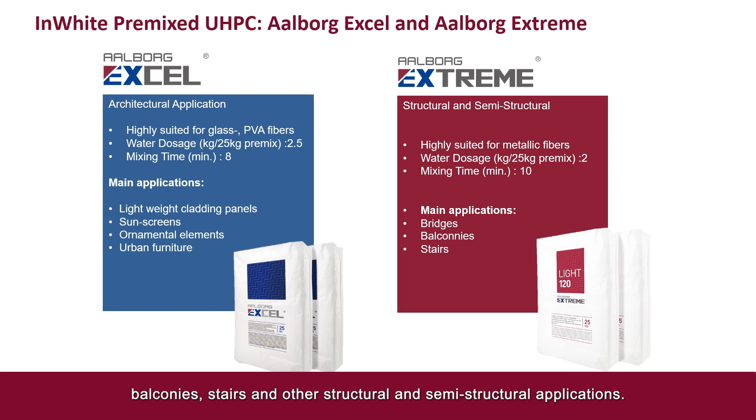Extreme is highly suited for metallic fibers and can be used in bridge decks, balconies, stairs and other structural and semi-structural applications. InWhite UHPC has been widely used in buildings, pedestrian bridges and landscape sectors.

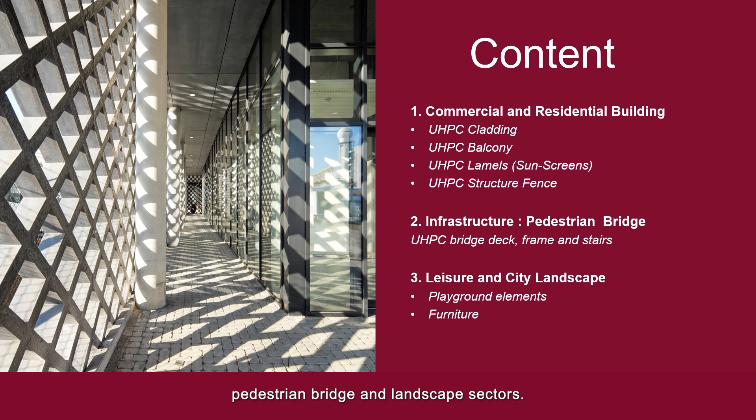We will introduce different applications through a couple of projects over the globe. First sector is commercial and residential buildings.

UHPC facade, lamels and balconies are widely favored by architects and property owners to enhance the building aesthetics and durability.

The new Westminster Secondary School is one of British Columbia's largest school replacement projects. The total project area is 22,000 square meters with 3-story facilities. It is LEED Gold Standard certified and was inaugurated in September 2020.

The new building is designed and built based on a design-build process. Graham Design Builders with KMBR architect planners were selected to design and build the new school. The building facade is composed of light color UHPC panels and dark striped wooden panels.

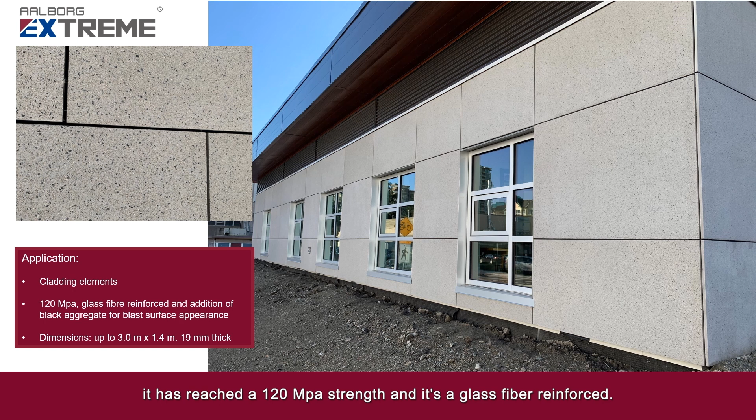The dimension of the panels is around 3 meters by 1.4 meters, only 19 millimeters thick. It has reached a 120 megapascal strength, is glass fiber reinforced, and we added some black aggregates for a blast surface appearance.

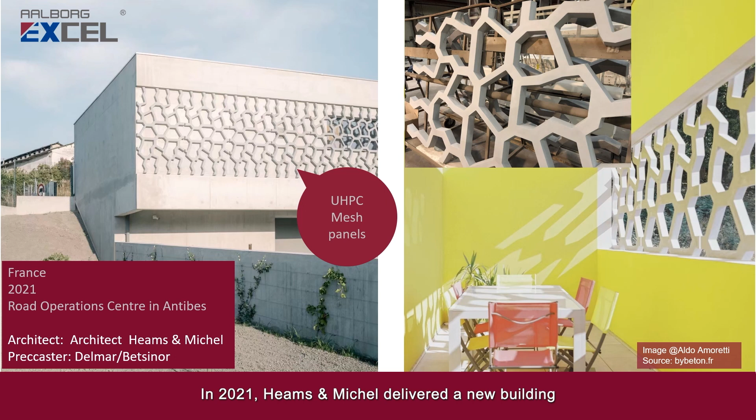The Antibes Road Operations Center. In 2021, Heams and Michel delivered a new building to house the Alpes-Maritimes Departmental Road Operations Center. The building is constructed entirely of unfinished grey concrete with a smooth finish.

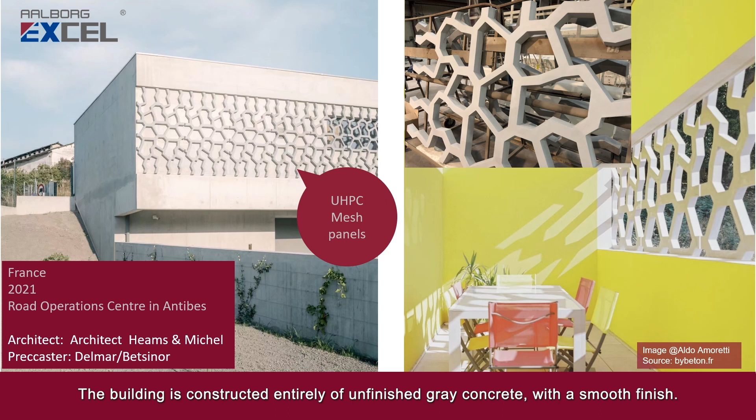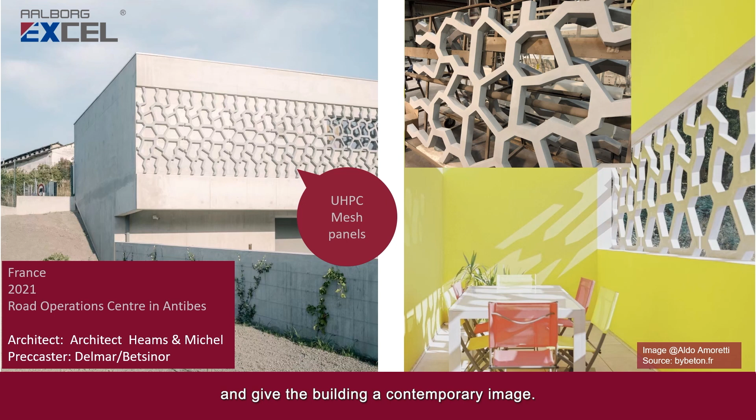Excel UHPC mesh panels in white color are part of this architectural identity and give the building a contemporary image. The pattern is inspired by the tire footprint of a road machine.

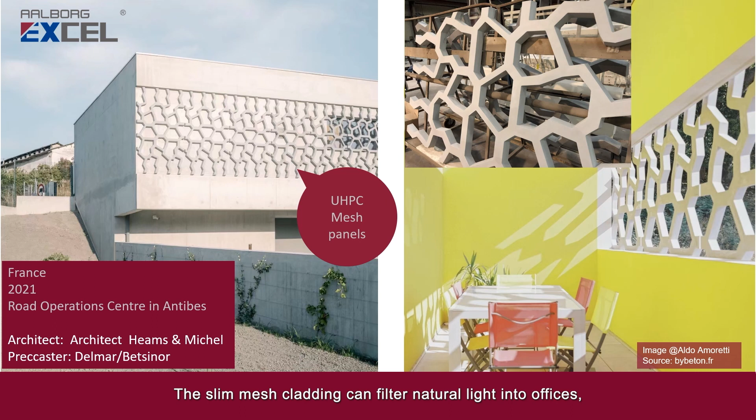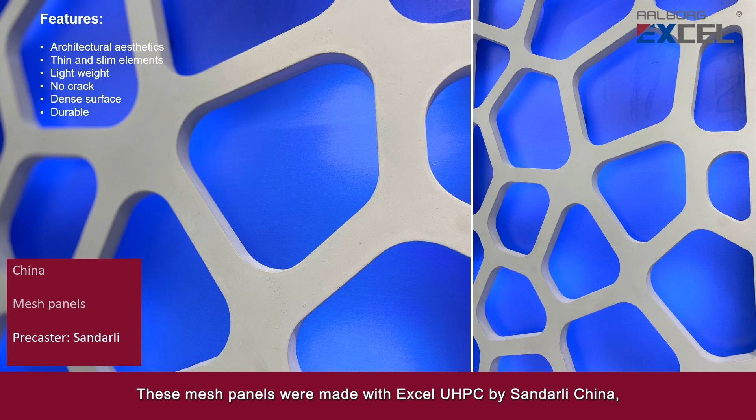The slim mesh cladding can filter natural light into offices, creating a game of light and shadow for the interior space. These mesh panels were made with Excel UHPC by Sandarli out of China.

Mesh area reaches 65% of the entire panel. The cross-section thickness is 30 mm and the width is 40 mm.

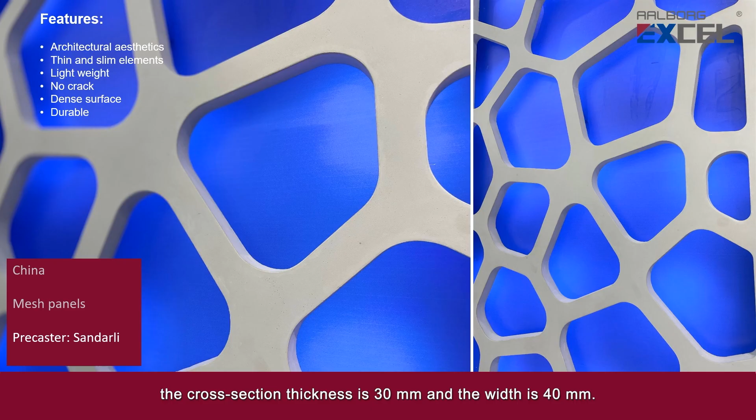Louisastraat in Ostend, new project. It's a new apartment building in the center of Ostend.

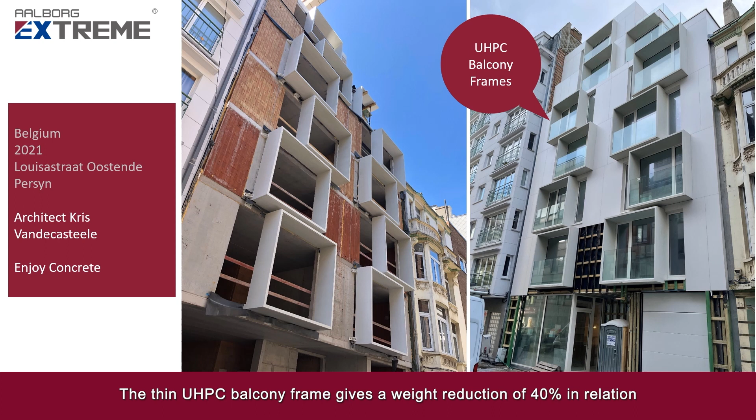This thin UHPC balcony frame gives a weight reduction of about 40% in relation to traditional concrete, giving the building high architectural aesthetics. The UHPC balcony was produced in one piece, so no joints are visible, with a very stable geometry.

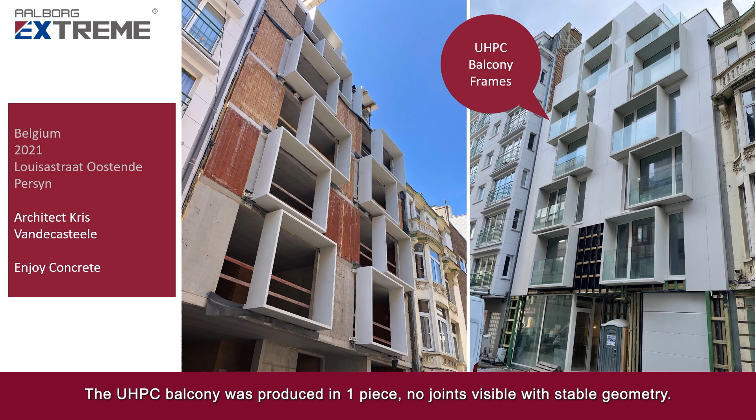The architect Kris Vandecasteele wanted something very new, very special, very slim, very slender, and also in one piece, but strong enough to hold persons.

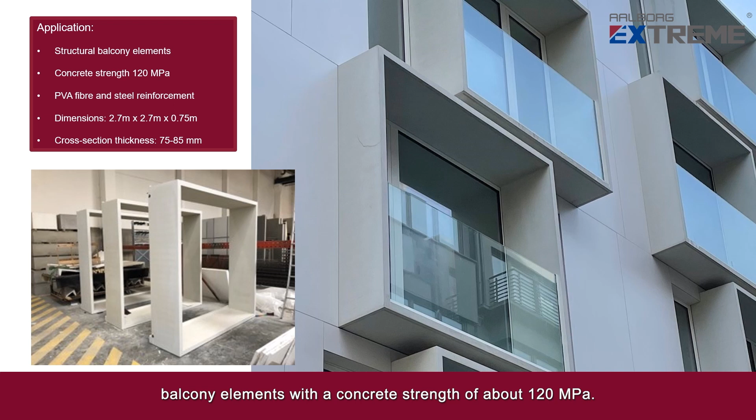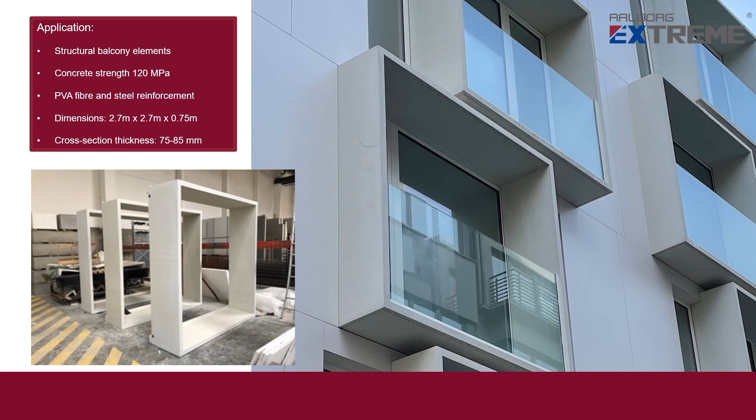So these are structural balcony elements with a concrete strength of about 120 megapascal. It's PVA fiber and steel reinforced, with dimensions of 270 by 270. The cross-section thickness is only about 75 to 85 millimeters, so very, very slim.

A new apartment building in Kortrijk, Belgium, with large window surfaces. This is why it needs protection from the sun. The slenderness of the UHPC lamels gives a weight reduction of about 40% compared to traditional concrete elements.

It's easy casting without steel reinforcement, only PVA and PP fibers included. The light gray color is mixed with white extreme UHPC and a small quantity of black pigment.

The vertical casting ensures smooth surfaces on both sides compared with aluminium or steel lamels. UHPC is more durable, requires less maintenance, thanks to its dense surface, and never needs to be painted.

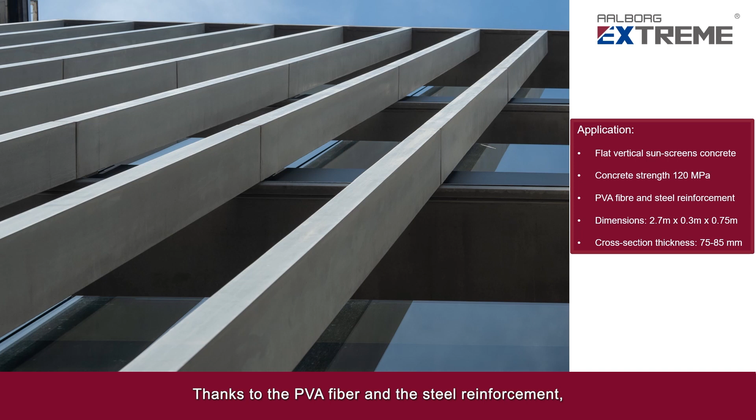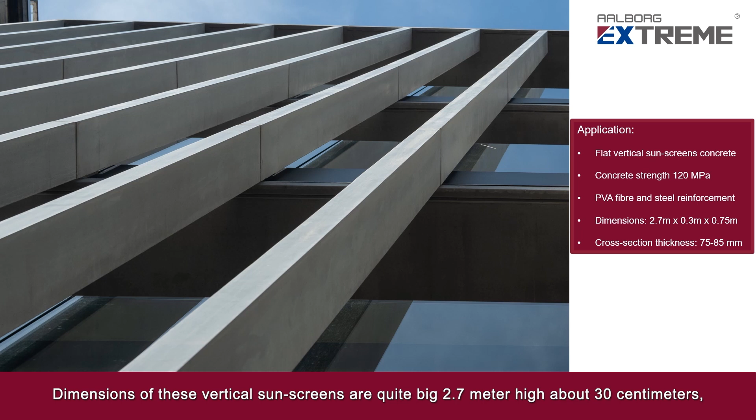Thanks to the PVA fiber and the steel reinforcement, we reached a concrete strength of about 120 MPa. Dimensions of these vertical sunscreens are quite big: 2.7 meters high, about 30 centimeters wide, and only 75 millimeters thick.

Beautiful building in Newport, Belgium, Lighthouse Corner. The same UHPC lamels design concept has been applied for this new apartment building in Newport, completely in white UHPC.

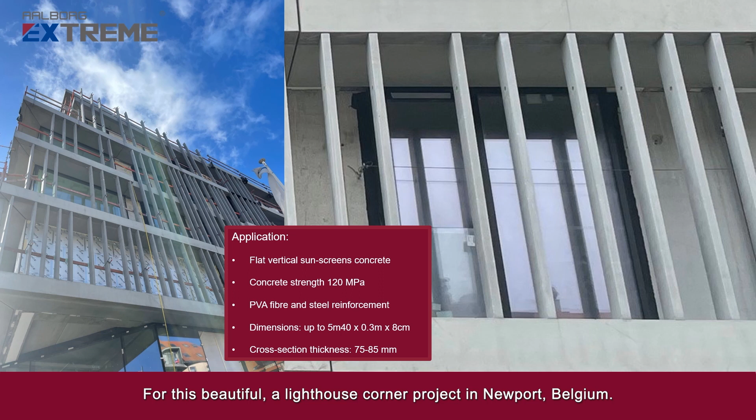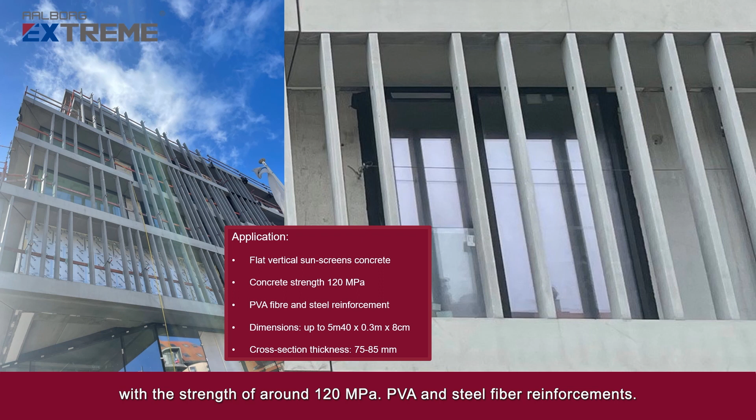For this beautiful Lighthouse Corner project in Newport, Belgium, they used flat vertical sunscreens in UHPC concrete with a strength of around 120 MPa, PVA and steel fiber reinforcements. The dimensions were 5.4 meters at around 30 centimeters of width and only 8 centimeters of thickness.

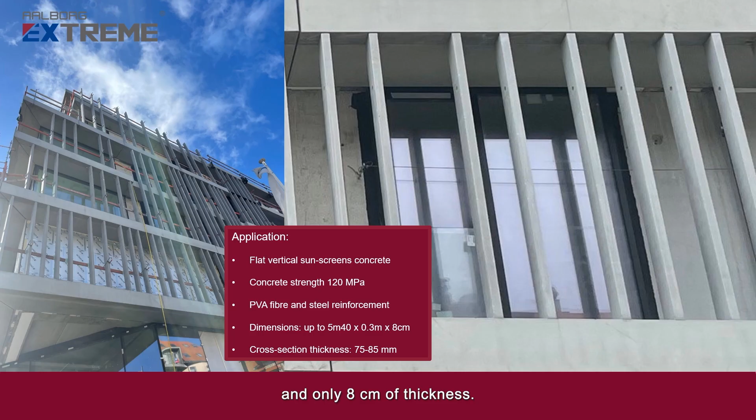Zash project near Reims-Bézannes in France. Zash is an office building project located in the Reims-Bézannes business center. One of the most striking features are the flat and curved horizontal UHPC sunscreens. The UHPC elements were designed and produced according to French UHPC standards, perfectly matched with traditional white concrete claddings. The project aims to create a more sustainable environment for employees through gardens and relaxation areas on both ground floor and roof terrace, striving for BREEAM Excellent certification.

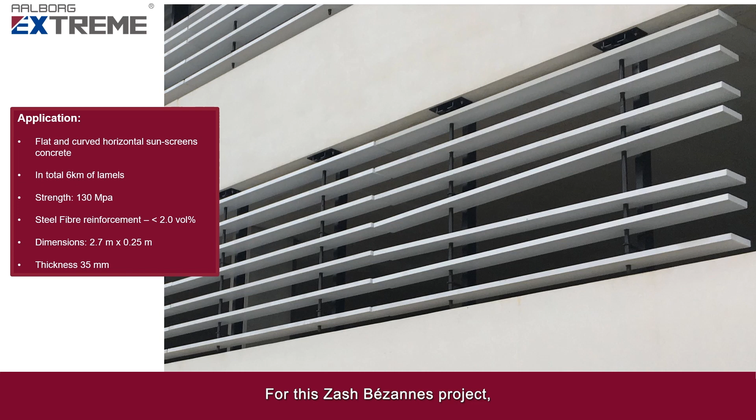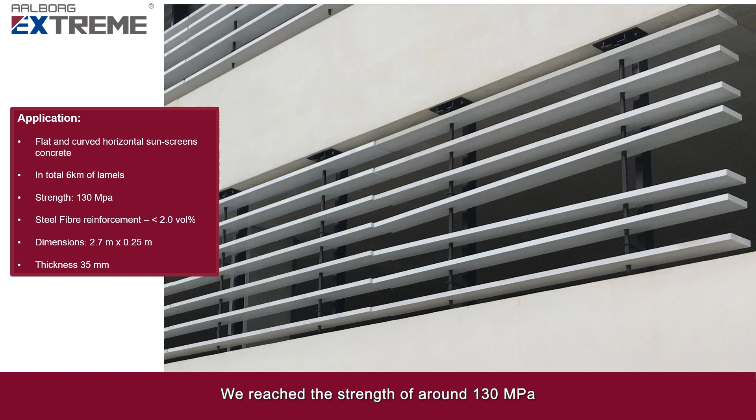For this Zash Bézannes project, a total of about 6 kilometers of these lamels were made. We reached a strength of around 130 megapascal, with only steel fiber reinforcement, around 2% volume of steel fiber. The dimension of each lamel is 2.7 meters by 25 centimeters width and only 35 millimeters thick.

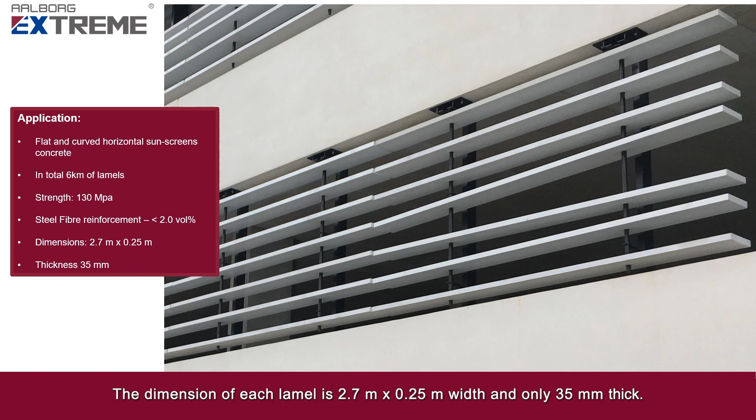Swissport project, Zaventem, Belgium. A new Brussels airport handling and office building for Swissport, designed by Archipelago and Group Infrabo and built by Cordeel Hasselt, has been completed in 2021.

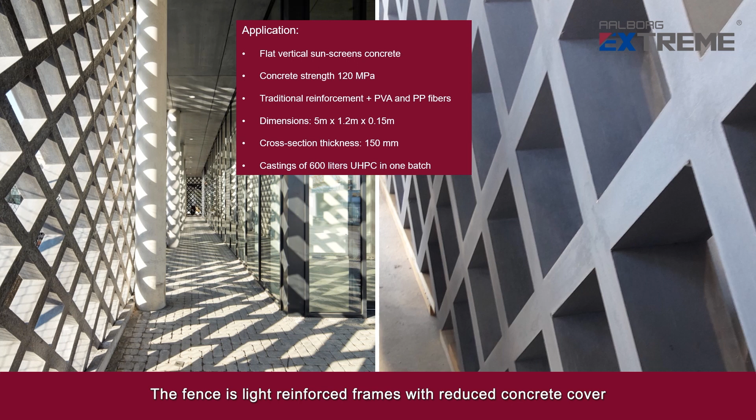A large area of glass facades have been installed for the ground floor office spaces and were covered with dark grey UHPC web fences in the outer space. With UHPC, you could make creative forms in the elements to allow light penetration while keeping the privacy of the office environment. The fence has light reinforced frames with reduced concrete cover compared with traditional concrete elements.

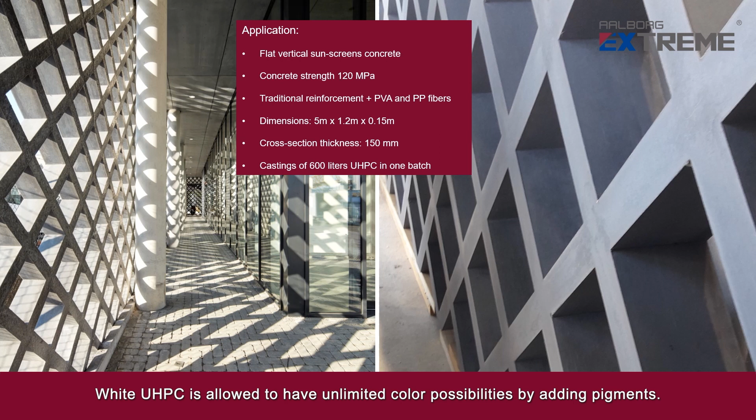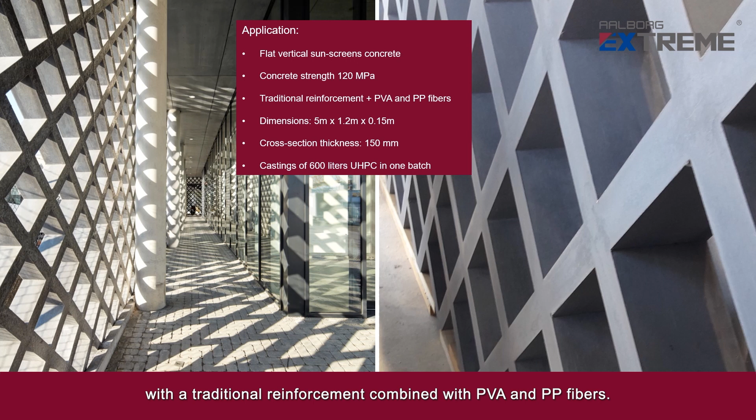White UHPC allows unlimited color possibilities by adding pigments. In this case, we reached a concrete strength of around 120 megapascal with traditional reinforcement combined with PVA and PP fibers.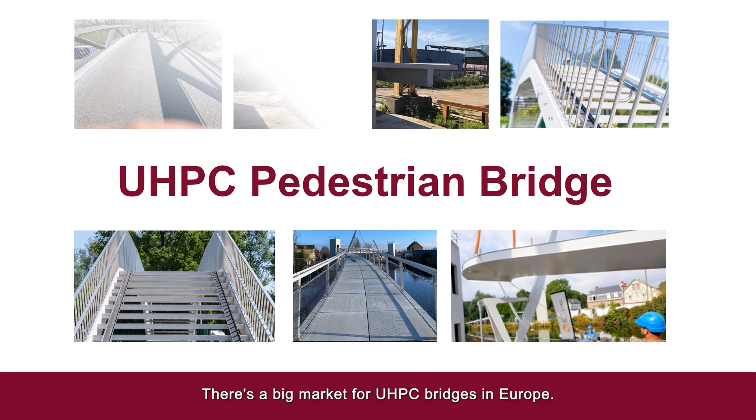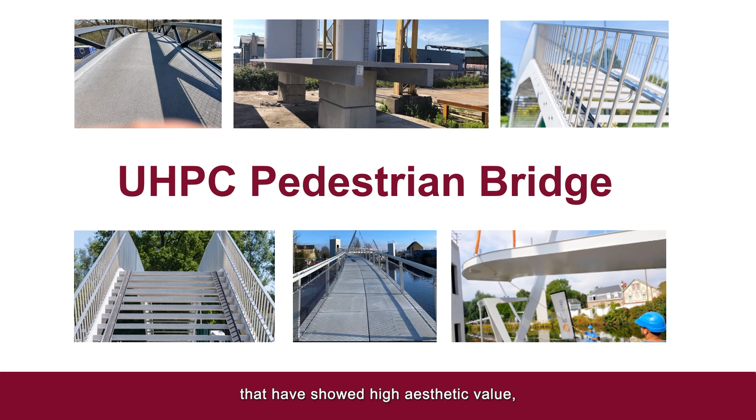UHPC pedestrian bridges. There's a big market for UHPC bridges in Europe. InWhite has several pedestrian bridge projects in the Benelux using white UHPC decks, frames and stairs that have shown high aesthetic value, smart engineering design and shorter construction lead time in the infrastructure sector.

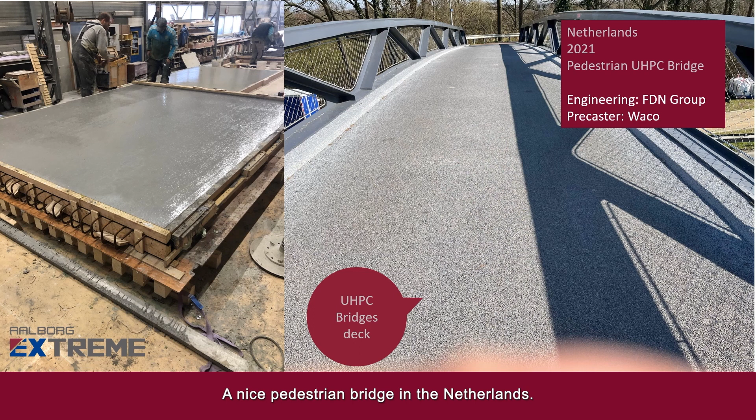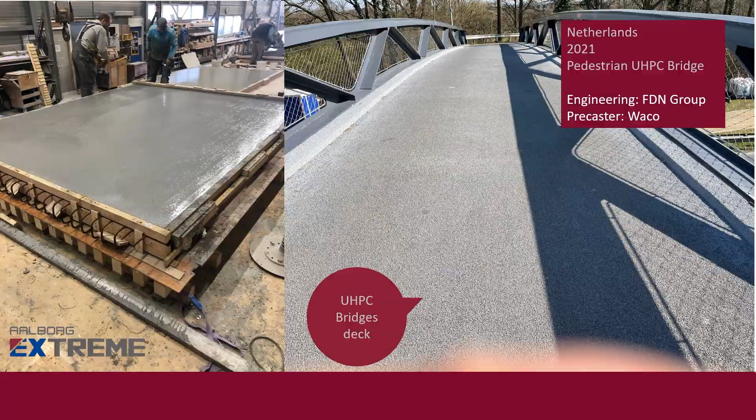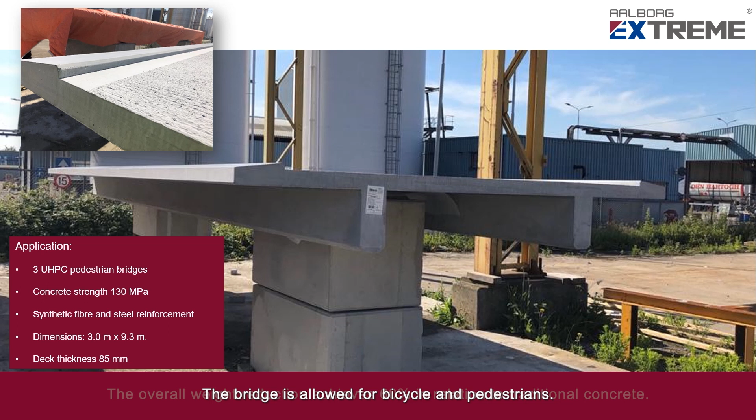A nice pedestrian bridge in the Netherlands. Due to its big format, the mounting of this bridge could be done in one day. The slim double T-frame bridge deck was made with UHPC. The bridge is allowed for bicycle and pedestrian use. The overall weight reduction achieves 60% in relation to traditional concrete.

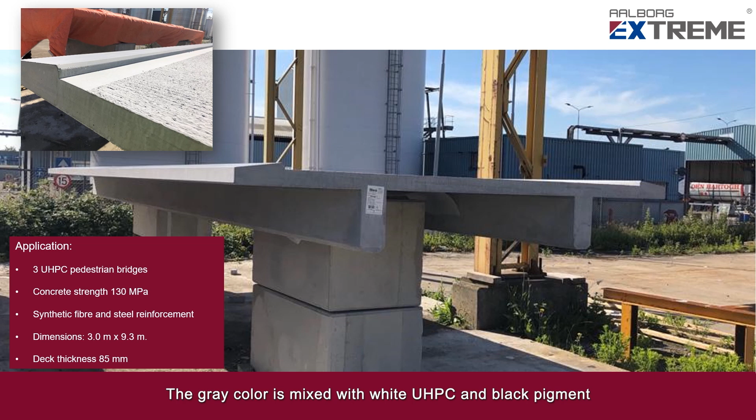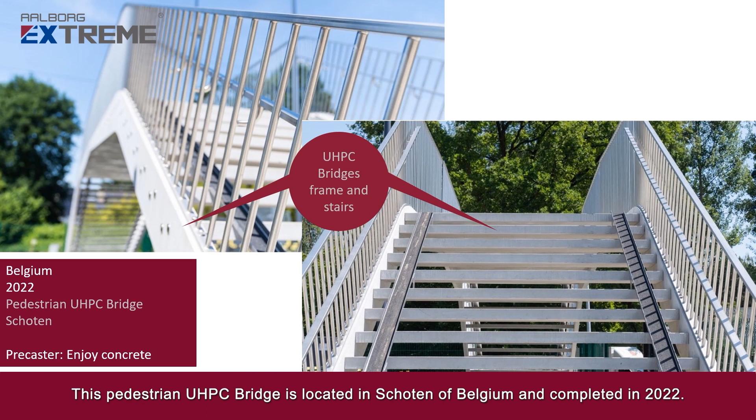The gray color is mixed with white UHPC and black pigment to give a brighter color and also a more even surface. This pedestrian UHPC bridge is located in Schoten in Belgium and completed in 2022. It has heavy reinforced frames with reduced concrete cover.

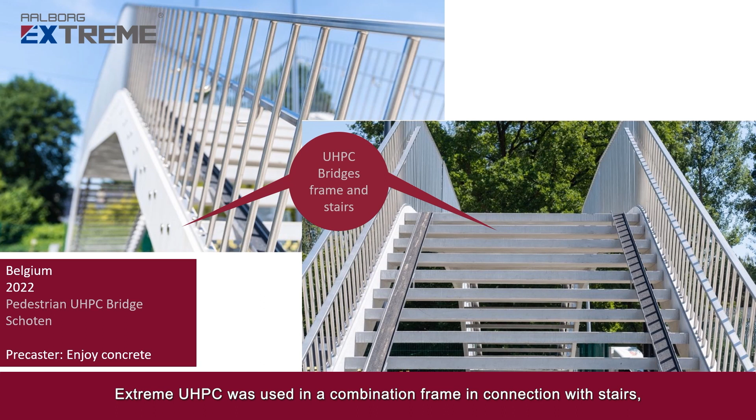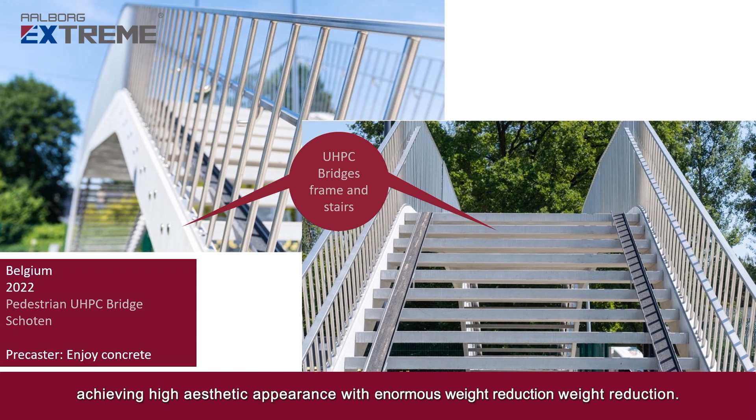Extreme UHPC was used in a combination frame in connection with stairs. Its light gray color with black pigment achieves high aesthetic appearances with enormous weight reduction.

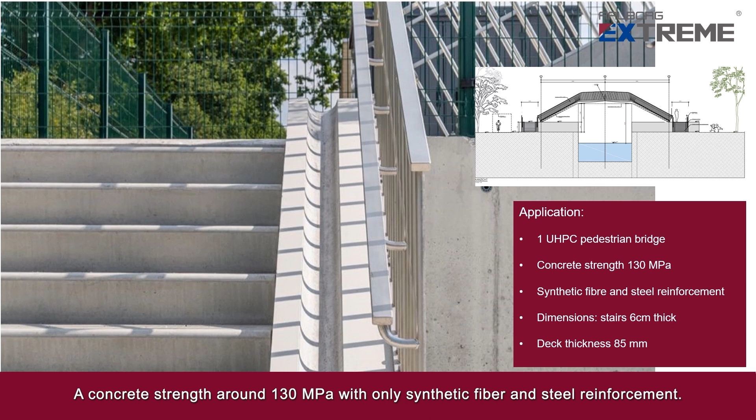Another pedestrian bridge, UHPC, with a concrete strength around 130 megapascal using only synthetic fiber and steel reinforcement. The stair thickness is around 6 centimeters and the deck thickness around 85 millimeters.

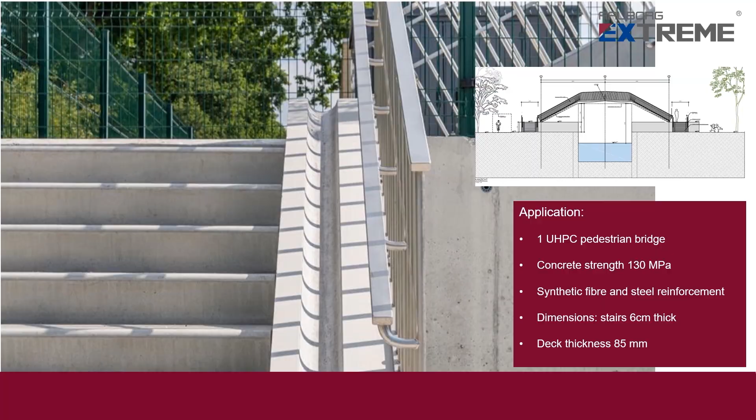Another pedestrian bridge, you can see that even curved elements are possible, and due to the weight reduction, larger elements could be mounted.

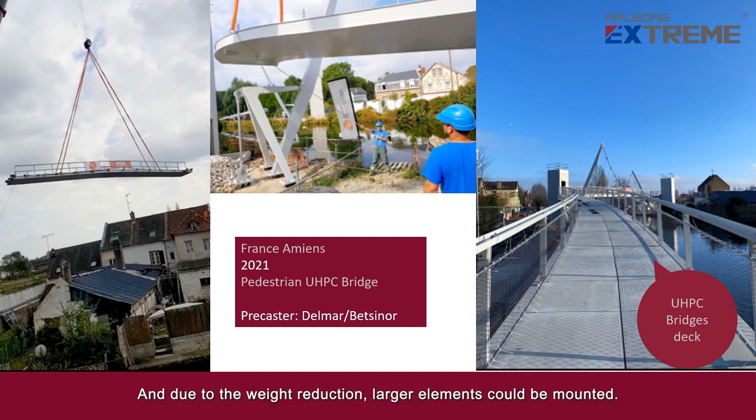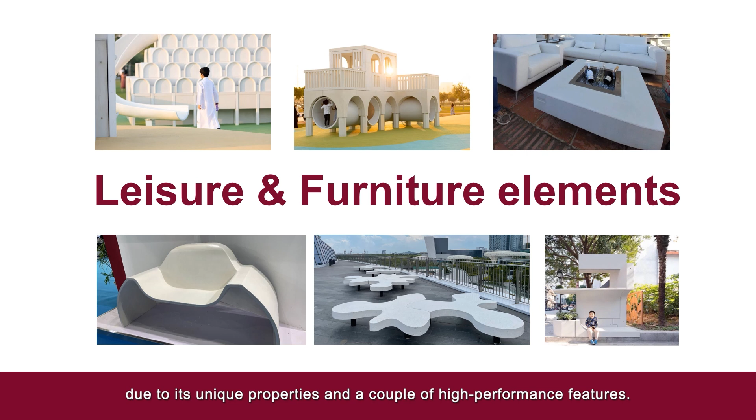UHPC is the perfect choice for outdoor furniture and leisure elements due to its unique properties and high-performance features. Qatari miniature buildings in the Doha Modern Playground. New UHPC structures in the Doha Modern Playground designed by Delvendahl Martin Architects, designed by artist Shezad Dawood and produced by MDM Props. For 1980s Qatari miniature buildings, materials used were Excel, UHPC and part GRC.

The real buildings were built between 1982 and 1987, and artists made some changes to their designs to make the buildings suitable for a playground.

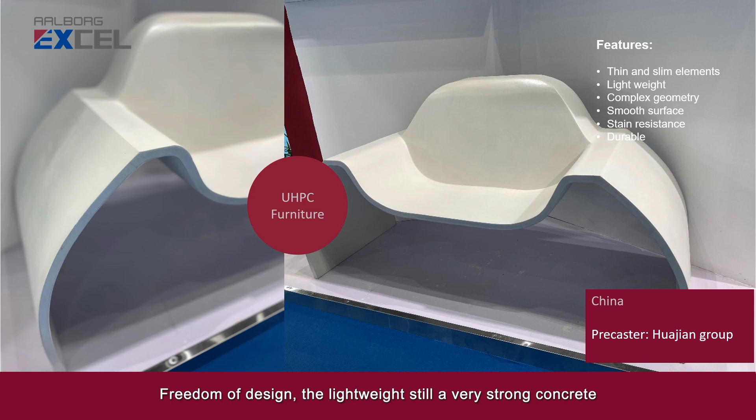Premix UHPC Excel is suitable for thin and slim outdoor furniture. It's lightweight, suitable for complex geometry with smooth surfaces. UHPC furniture is stain resistant and durable. The freedom of design, the lightweight but still very strong concrete makes this suitable for all kinds of applications from furniture, cladding, balconies and so on.